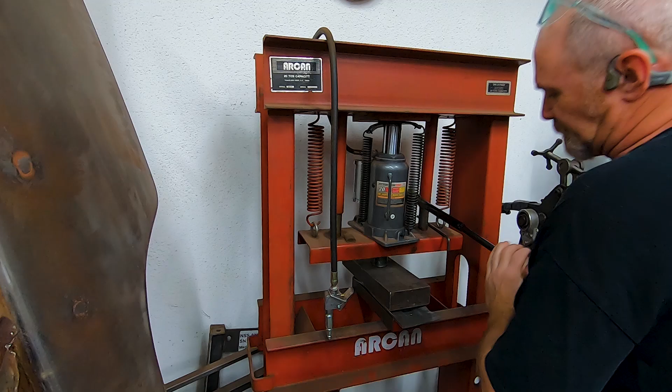Alright, so the next step is I gotta take the new blank and I gotta start putting these beads in here. I haven't quite finished some of the welding and stuff on this. There's some finish work to do. We'll take care of that after we get that patch panel over there put together.

But I think I'm gonna try something and combine a couple of different videos here. I want to make a 3D printed stamping die to try to at least get maybe these two. So I'm going to trace all this out and make a pattern of the depth. Then I'm going to go back home, fire up the 3D printer, fire up my software, and make a die out of ASA, which is like ABS, 100% infill, and then I'm probably gonna try to stamp it out on my hydraulic press.

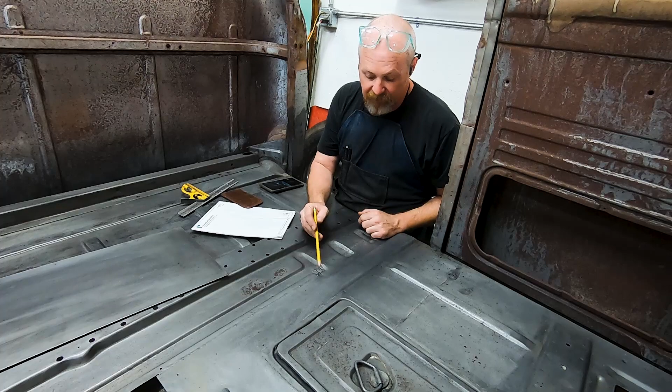Again, my goal here is to make this look as factory as possible, and having big ugly welds and hammer marks and beat up stuff all over it is not my style. I want it to look better. Most guys overlap it, MIG weld it, bury it in mud, bed liner, whatever it takes. So we'll dimension all this stuff out, then I'll pick the depth, and then I'll take this stuff home and we'll get started on the next part.

Usually the best thing to do is a one-to-one drawing of exactly what you've got going on, right? So take a piece of paper and lay it right over the top of that, and then just take your dirty finger and trace around the open hole, and it'll leave a mark where those holes are. It just makes dimensioning stuff a little bit easier. Probably can't see that all that well, but lighting is what it is.

So, tape measure, from my kangaroo pouch. We can go peak to peak to peak, so we know where everything's at. And as with typical tape measures, you drop it a bunch of times and the end is hard to read. It's supposed to be loose like this. I don't know if you know that, guys. I don't know how many times I've seen people get frustrated, saying this tang is loose, this thing's bad. Well, it's for inside or outside, depending on where you're pulling your dimensions. So it's an engineered amount of slop, right?

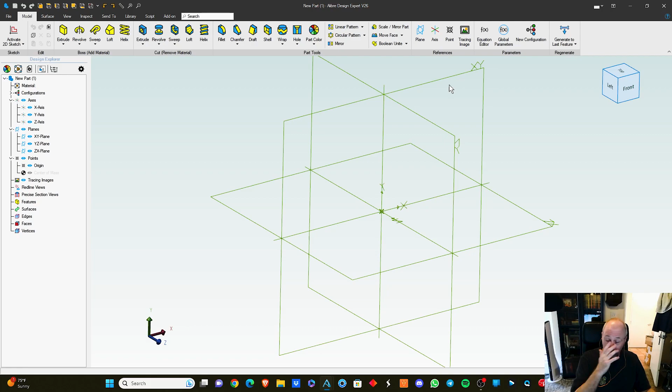So anyway, pick a plane, our XY plane. We'll activate a sketch. I don't have a preset on this one, so I'll have to hit the reset view kind of thing. So now we've got into sketch mode. So let's pull our rectangle tool, and we'll draw just a basic rectangle. And don't worry about dimensions.

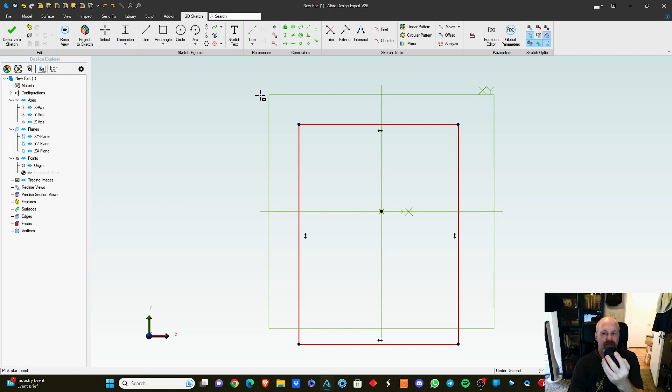Now, I'm used to my keyboard shortcuts. I don't know a whole lot of them because it doesn't matter in Alibre that much. But if you hold your 2 mouse buttons down and the shift key at the same time, you can pan. Or if you hold your left and right mouse buttons down without the shift key, you rotate it. And then we hit reset view and it snaps back. I know in Fusion you can make it work that way, but it's not their default. They've got their own way of doing things, so I just struggle. Let's make it happen.

So we know our die set is going to be 1 5/8 inches wide. So our base, the platform we're going to build, needs to be bigger. So like 2.5 would be a good width. So let's do that, because we're just going to do one of these at a time. I thought about it, and I think that's going to be the better solution. Now, you see it shortened up on one side here.

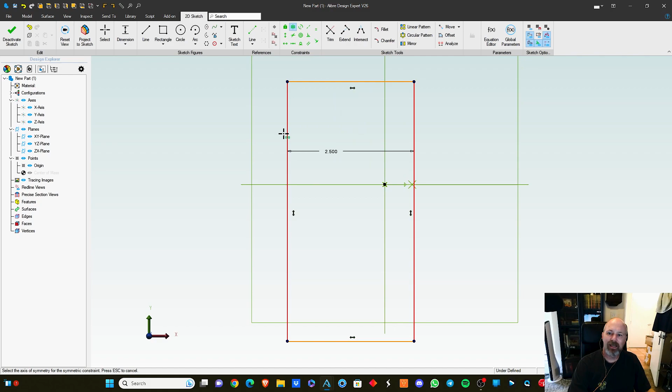And it's offset, right? So there's a couple tools. Up at the top, there's a symmetrical constraint. I like that one for a lot of this stuff, if I'm not going to be rounding the corners and stuff off, and there's a couple ways to do that. I can show that stuff down the road here. But that one works pretty good. We're making a platform, and then we're going to radius some of the corners after we process this thing.

So let's just make the punch, basically the piece that'll go into the top. That's the part we're going to make. So our overall length is, let me do this. Let's put another rectangle in here. Okay, and then select, highlight everything, right? And then right click, convert to a reference figure. So now you see it's a green dashed line. So when you do any more functions with it, that is just like measurements, right?

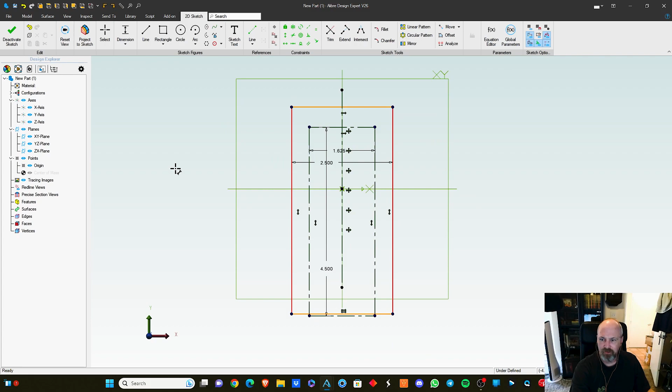So let's go ahead and centrally constrain this one, and then dimension it, right? So that is 1.625. And then our height is 4.5, right? So let's do our symmetrical constraints. Scroll wheel is your zoom, right? So pick our midline and our outer pieces. Okay, so it centers that one up. Let's center the block that we're going to build here.

Okay, so now we've got, this is our reference, this green line frame, and then you see the red, orange, and then they'll turn black when they're fully constrained. The red ones are because we don't have any dimensions, the oranges because we do have a side dimension on it. That's our 2.5 here. So we know that's what that is. So you can drag that, and then you can kind of get an idea.

So we know that our wall thickness is 7/16 of an inch, right? So let's make this the same. Let's make that .4375, right? Okay, so now you see it's all turned black. Now hit deactivate sketch and extrude and put it into perspective. So default, it's 5 inches bossed. So you can change that while you're in this window.

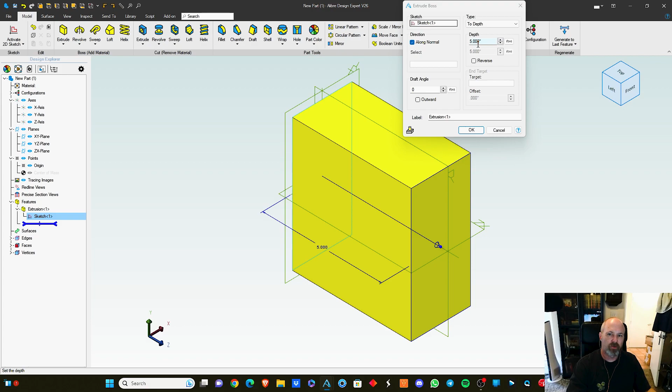I only want it, say, 1/2 inch. Or if we want to go the other way, because we're gonna make the punch, right? So we want to reverse it. So you hit the reverse tab, it pushes it out onto the other side of your plane, your working plane. Okay. So now that you got like a basis, it's really smart to just start saving some of this stuff.

And let's go. I catalog everything. I try to put everything into folders, and if you don't, you get a big mess real quick, right? I thought I had just a. Oh yeah, right there, 53, 56. So extra cab truck, and we'll just call it floor. I've done a couple of them there. I already saw some of those, right? So we just call it rib punch A, right? So we know we get the small.

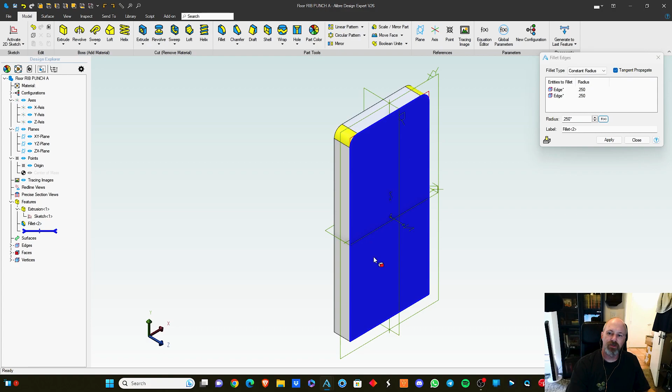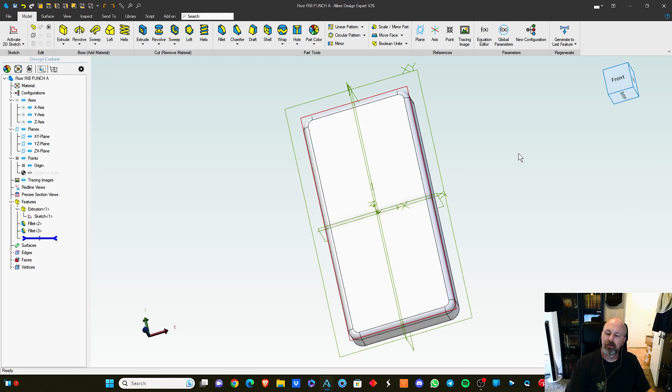Now you could go through and you can hit your fillets, and you can specify how big you want your fillets to go, right? So you can go right on those edges. If you're gonna make a punch, having softer edges is gonna leave fewer marks in your metal when you're done. Okay. So then the other one is we can hit right on the top, and I want to reduce that to, I don't know, 1/8 of an inch, because I don't want that big of a radius on the top of that. So now you can see that's our piece, right? So now we need to make the form.

So a couple of ways to do this is let's pick our YZ plane, activate that sketch. Okay, and then, oops, hit the wrong button. Hit caps lock instead of shift. All right. So just go ahead and start kind of sketching out what we're gonna do. And remember, we've got that radius that we got to deal with, right?

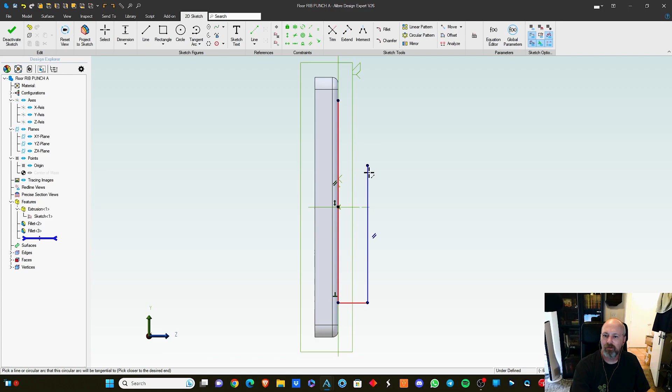And then go into our arc tools, and there's a tangent arc. So we can select that line and do that. So now we've kind of got a basic shape of what that is. We're going to edit this here. That's where it's coming up close to the seat platform. So let's go ahead and dimension. So we'll pick our plane.

Alright, so that's another way to centralize that. I could have done a symmetrical constraint on that, but because it doesn't have 2 lines that it's constraining, it's just got 2 points, sometimes it can fail, it can lose that dimension. So we're going to do it that way, and then we'll make sure that our baseline is right on that axis. I'll lock that down, and then our depth was 5/16, right?

I did write that down. I know I said it and I forgot to write. Oh yeah, there it was. 0.3125 deep. So we got that. Now, let's put the radius on this, because this is going to make doing our constraints easier. Right? So see, it doesn't want to do it that way.

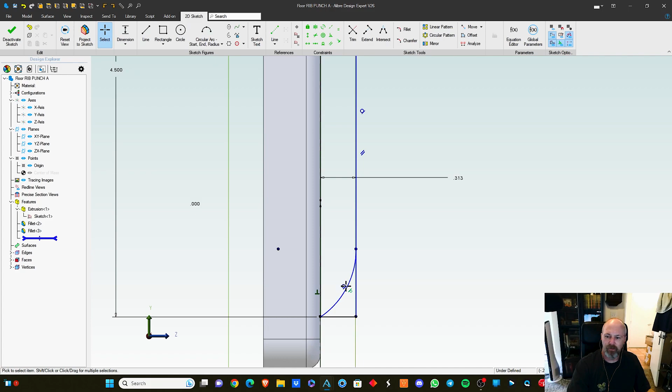And see, it auto constrains. It put a tangent constraint right on the panel. You can see everything's highlighted in blue there. So now we can go through with the trim tool and knock out all the other extraneous stuff. So we know that the bottom footprint, the flat part, was 1.188 inch and 3/16. I'm sorry, I did the wrong dimension. So it's 2 inches, and then it's inch and 3/16 long.

So let's grab our tool. We can move this and see how the radiuses change. Now, one of the things I did is I measured basically from point to point, and I came up with 1.25 inches. So that gives us our radiuses, and that's also 1.25 inches. So now we kind of got an idea, and if we want to change something, see this one's in parentheses here. That means it's just a non-editable dimension. The ones that are not in parentheses, you can hit edit.

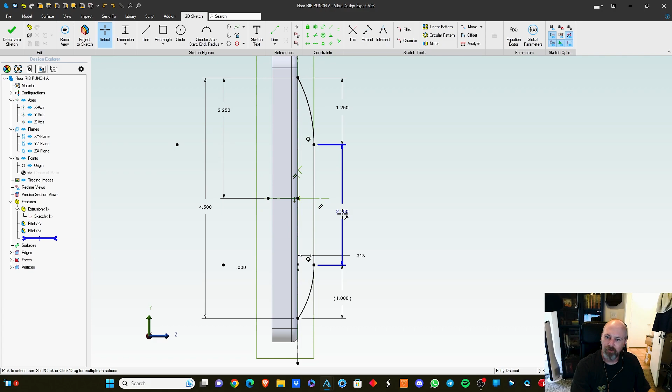I'm just gonna do it. So say we want to make this 2.25. See, it changed it to 1 inch. Okay, so that works out pretty good. Then hit Control Z, undo it, it puts it right back where it was. So deactivate, everything's in black now, and then we go back to extrude and roll it so you can see exactly what's going on.

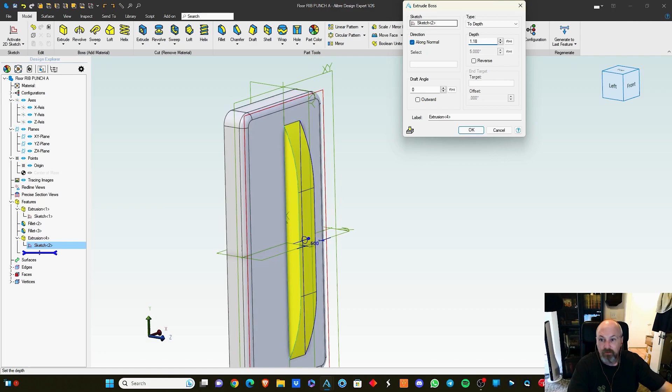Now, this is the 1.188, right? So now it's offset. Edit. You could have done this before, but up at the top here it says mid-plane. Hey, look at that. So that is our punch. But we want more of a zero clearance on this. So hit our chamfer tool, and you can do it in a couple of different ways. Our overall was at 1.625 inches, right? So we want to get out to that.

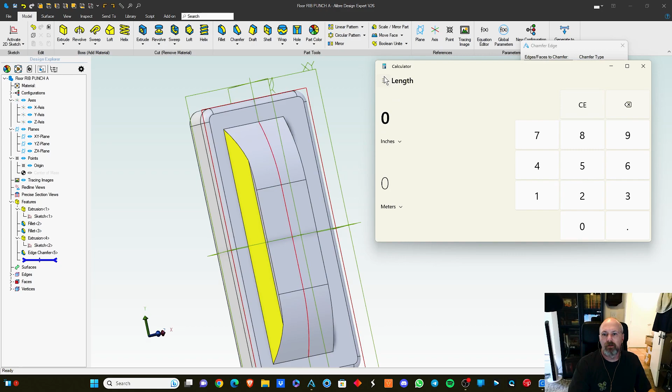So we can do a little bit of math. Get your calculator opened up. 1.625 minus the 1.188, divided by 2. So that is our dimension. So we want to go back in. I'm going to take this off the screen just so you don't have to look at it. So distance, distance. Okay, so we got to change this. One is going to be 0.2185, and the other one is 0.3125. Yeah, look at that. Perfect.

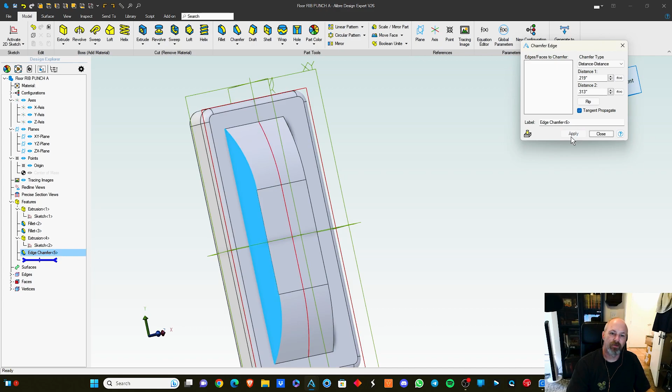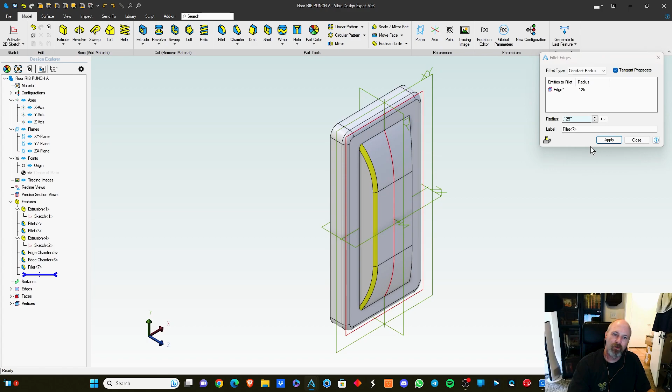So put it on the other side. Look at that. It auto-generated it all. Alright, close. Oh, shit. I forgot to hit save. Apply. Okay, so save it. It's important to save as many times as you can. So now we want to go through and put some chamfers on things. 1/8 inch is good. You can pick multiple, apply.

And then around this, it's probably got to be a little bit bigger. It's a top radius. So you got to think about the top and bottom of the metal. That's how it's going to push down into the sheet metal. So that's our basic die. Save. That's our punch, sorry. Now, we want to put a couple holes in it so we can bolt it together. So just pick your XY plane again.

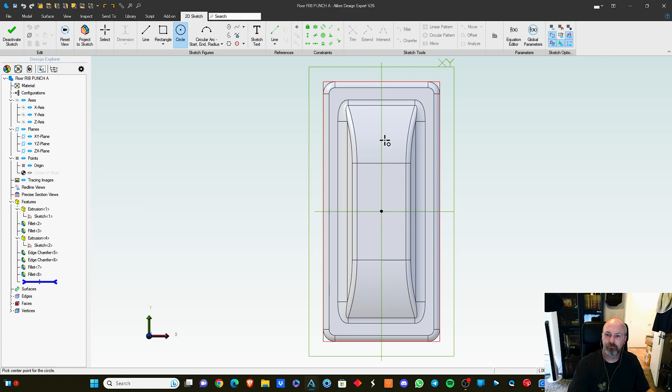And now we're just going to do a couple holes. It really doesn't matter where you put the holes. And make those equal. Sometimes it'll auto constrain, sometimes it fights. We're going to equal constraint. And now we'll start dimensioning them. 5/16. Alright, and then I'll put a distance on these. So let's make them 2.25 right there in the base of it.

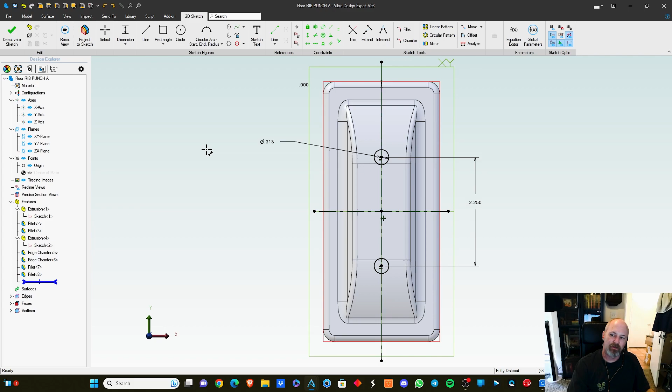Oh yeah, see they're orange because they're not locked to that middle line. Now they are. So you can go ahead and continue even if it's not constrained, but just be aware that if you do any processes down the road, those holes could have moved to one side or the other. So deactivate, and then we're going to extrude through all. All right. So now we've got that. So that's our punch.

Save it. All right. So now that's going to be the piece that pushes down. We're going to form that little mini ripple like this, right? So I'm going to put a B, because this is the back of the vehicle, right? So I know which radius is which, because remember the radiuses are... no, the radiuses are the same, so it won't really matter. I'm going to put it on anyway just to show what you can do with this.

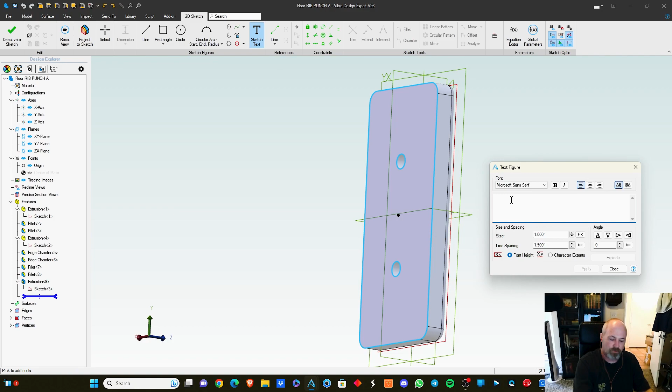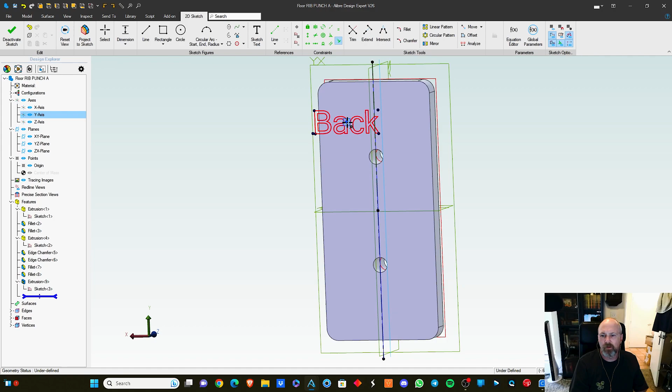Text, just put, and then we've got to shrink that down. Apply, and then we can constrain it. There's a coincident constraint right on the middle there. Oops. One. Let's go higher. Yeah, see that? It does this every once in a while. You hit edit and it doesn't actually do it. There we go. I like that better.

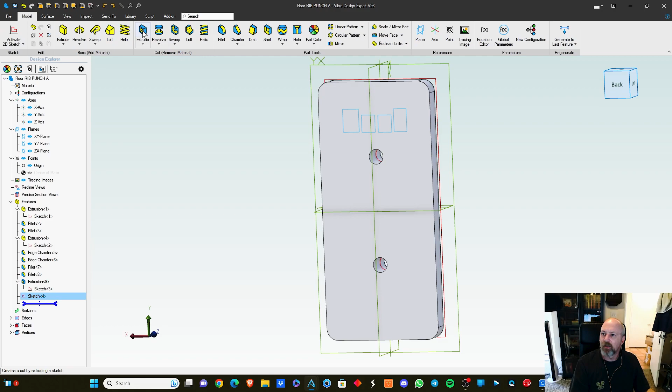Okay. So now deactivate it and then extrude. And we just want this to be like 50 thousandths. We don't want a huge... Wait, did I hit the wrong one? Wait. Why is it doing that? There it goes. All right. I don't know what I did there. So now we've got our top punch kind of drawn, right?

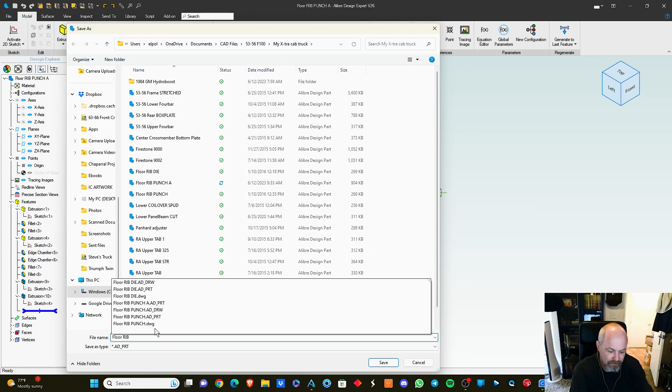So let's save this as B. We're going to call it die. Okay. So now we've got a lot of this stuff already drawn, right? So let's knock the fillets out. Just suppress them because we might be able to reuse some of those. Alright, so now this is our progress bar. In Fusion, I think you'd call it the timeline. We can move it up and down on this one.

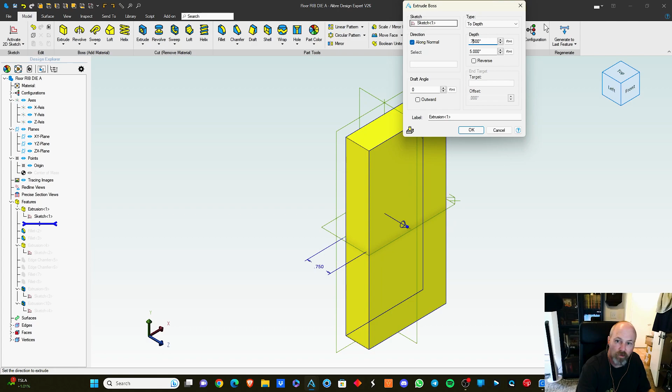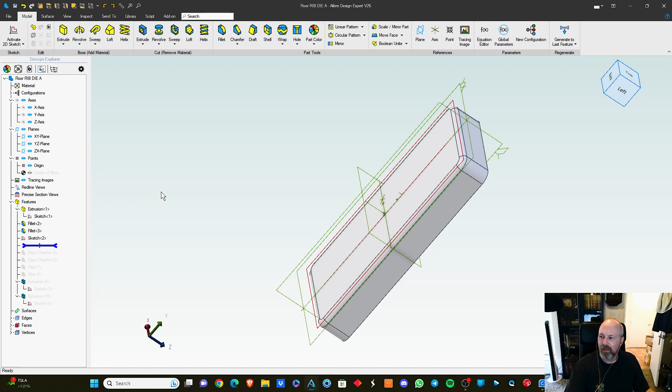So now, our extrusion, let's reverse it. And let's make it a little bit thicker because we're going to make a hole in the middle of it, right? So now we make our radiuses. And again, the fillets on that side, and that's good. So now this one is the problem. Now I just made this inside. So let's delete that, and then let's do an extrude. Same dimensions, mid-plane, right? Mid-plane 1.188. Okay. So now we got our pocket.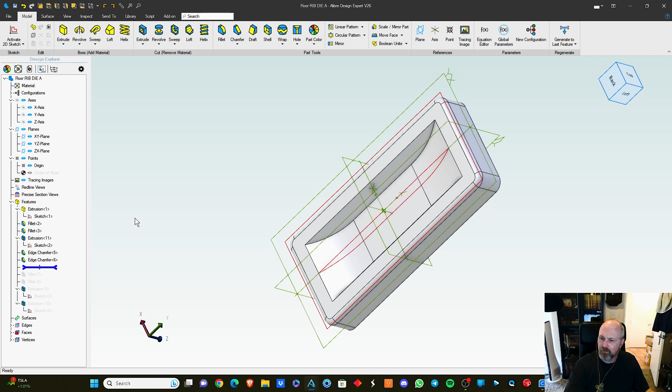And then let's see if we can get some of these edge chamfers to come back to life. Unsuppress them. Nope. So let's edit. Look at that. It did it. Okay. And just pick that edge. Okay. Alright. Now, there's a problem I've already introduced here. The depth is going to be okay because we've got the thickness of the metal, but the width is not. The material we're using is a little more than 50 thousandths of an inch thick, right?

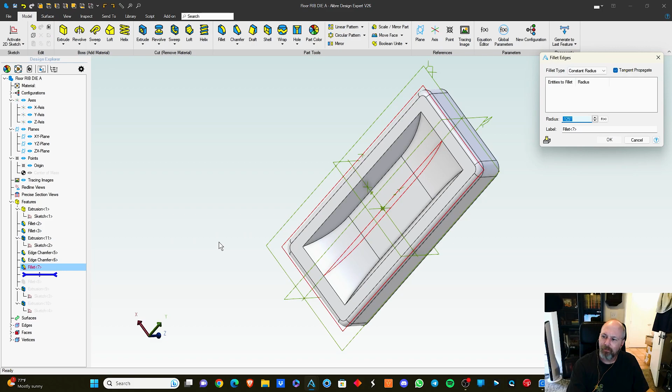So let's go back to our extrusion, and we can actually do math right in that window. That's just going to be on one side, so you actually need to make it 0.1, right? 0.1 inches. Look at this. Okay, so now we drag our little progress bar down. So now it's wider, so as the punch comes down, it pushes the metal in. It's got room for the metal to go inside. So now, let's see if we can get some of our fillets to come back to life. That was these guys, right? Yeah.

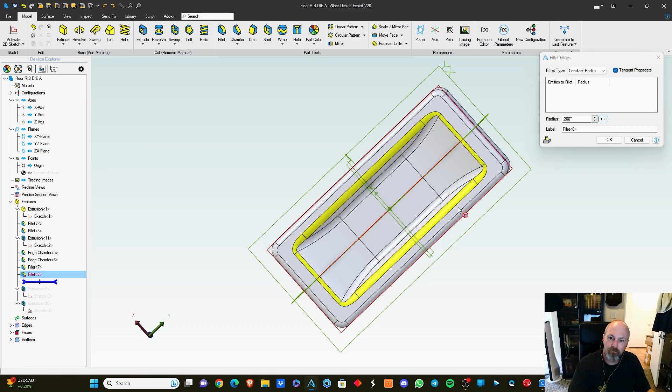So let's change that to the bigger radius. Let's make it 0.175 for the thickness of the material. Right. And then the next one was the outer. So we're going to decrease that one to just 200 thou, because we'll take that 50 thousandths radius off of there. Okay. So then we can go all the way down. We don't want to change the back. We can leave the back on there because it's still the back, right? So that's a quick way of getting everything put together.

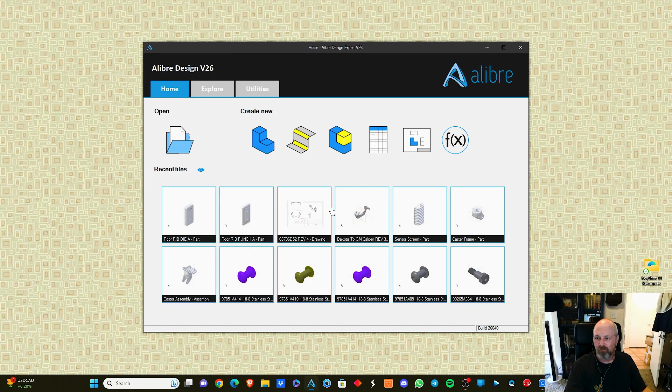So now, let's close that out. Let's make an assembly. We can just check our clearances. Where did I put them? I forgot what I just named them. Nuts. What did I name it? I can't even fucking remember. Floor rib. Jeez. My old brain. Insert design. Floor rib. Where did it go? There we go. Floor rib A. Don't worry about where they go. Just put them on.

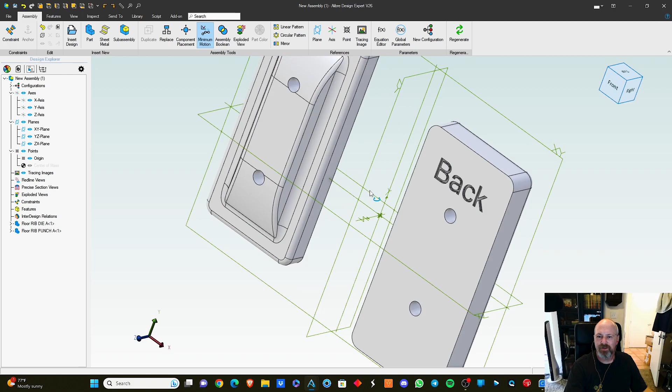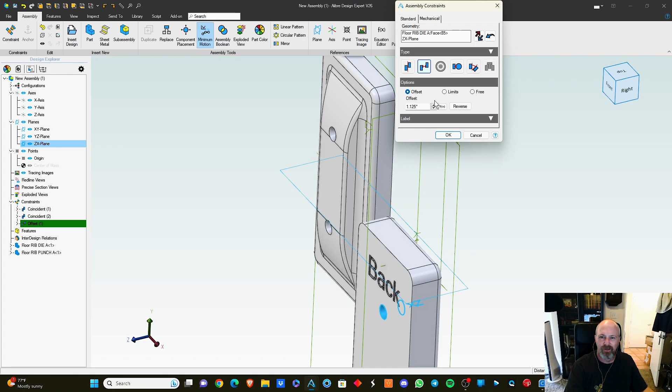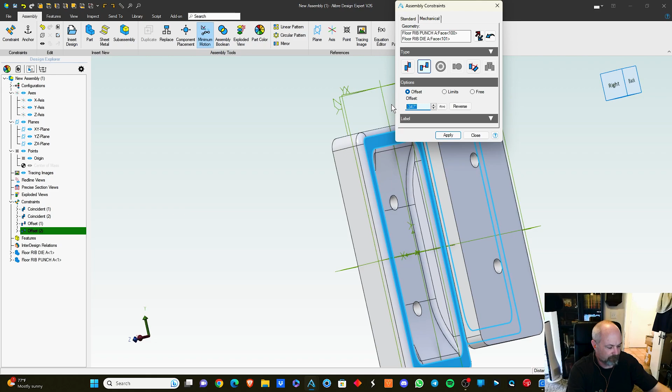Okay. So now we can see our two pieces. Probably the easiest thing to do is hit our constraint and then pick our plane. It's kind of hard to see in there sometimes. Just zero it out, and then our holes are a good centering device, right? Okay, come on. And we do another constraint. We put the two faces together here, and we're going to leave a 0.05. Come on. Alright, apply. And then we're going to lock these guys together. So now we need to check what's going on. So let's save this.

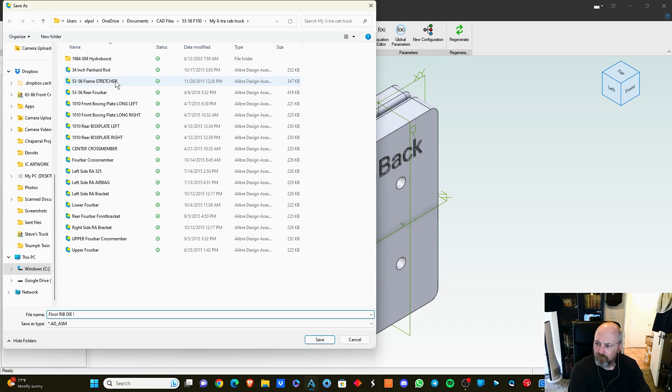Right, so now we need to add in a section view. So let's select the two pieces. And I want to pick my Z-plane. Okay, now when we look at that, we can see we've got a nice clean path of 50 thousandths all the way through this. Right?

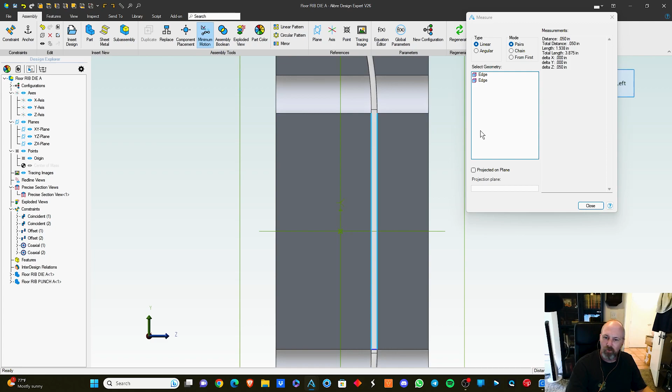So you can hit Control M, get your measurement tool, and you can pick these edges. And it should show you 50 thousandths of an inch right there at the top. Pretty cool. So just make sure that we've got everything put together pretty nice. And then we can hide that one. And now let's do another one. Let's add another one in the original plane, and the two parts that we're going to section.

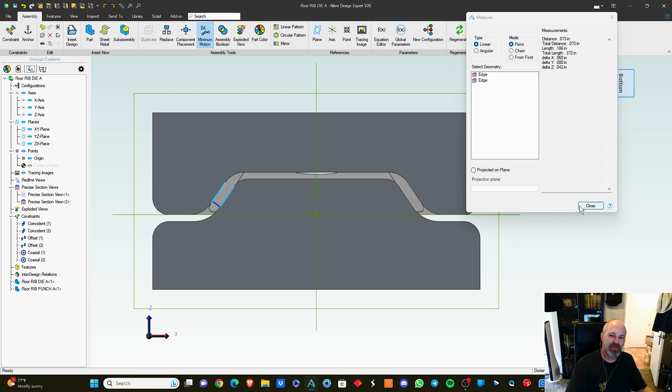And then we can look and we can see we've got a little bit more gap on the sides, right? So 73, because it's at an angle. So that 100 thousandths that I added into the die is too much. So let's drop that down to 75. So edit here, right? Edit here.

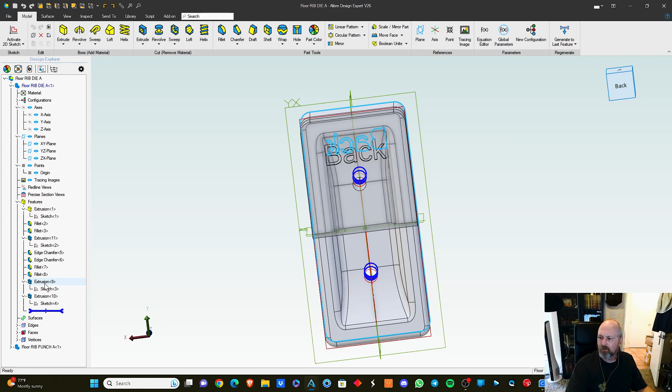Let's cut here. So let's edit that down. So it's got our 0.1. So let's just change that to 0.075. Okay. Close is going to be good enough on all this. Generate to last feature. Save it. And then we go back in. 60 thousandths. So that's not bad actually.

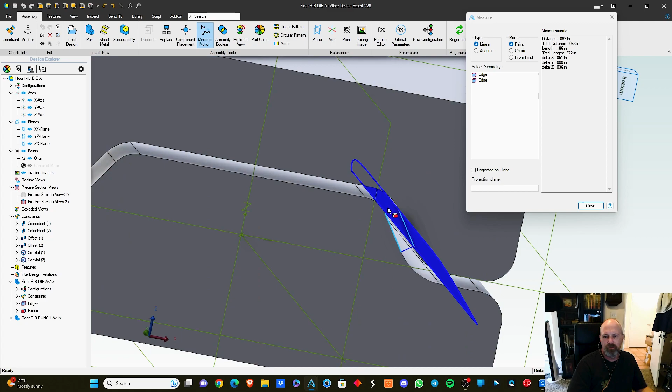If you make this too tight, you can actually start creating other problems for you. You want this impression and this impression to be a little bit tighter. You're trying to get those radiuses in there, so the angle might not be exactly the same. You can change the radiuses on some of these if you want. I'm going to leave that there as just kind of what it is. Let's hide that again.

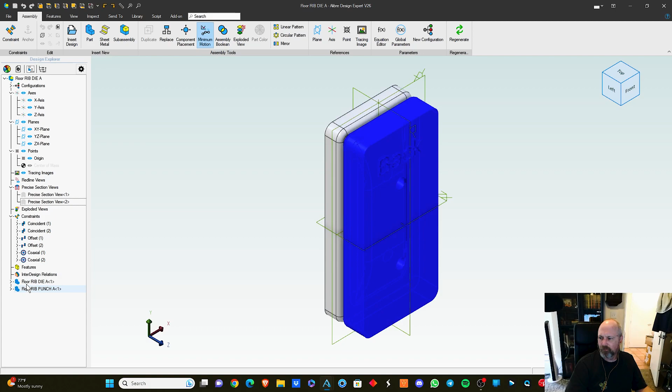Alright, so now we need to turn these into STL files, right? So we want to edit this in a separate window. Okay, and then we'll go into our export tab. Just an STL file, so we're going to 3D print this stuff. And we need to put it into the right file. I've got a lot of stuff preset on there as far as like faceting and stuff.

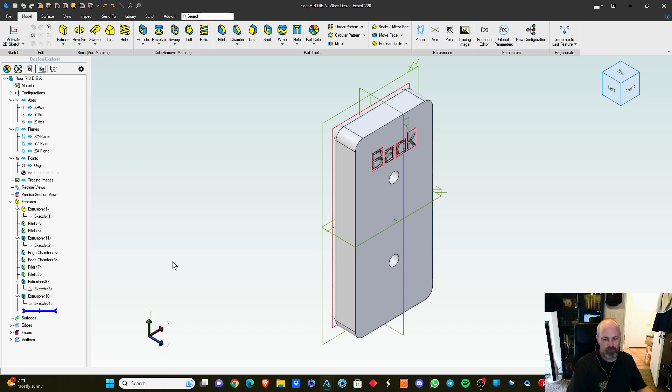You're going to have to experiment a little bit when you're taking your designs and pushing them out, because if you get too many facets into something, it can really slow your machine down. If you've got a good machine, it'll handle that stuff a little bit better, because the fewer facets you have, the rougher, the more origami looking it would be. So you want to put as many in there as you can, but there's a certain point where it's just useless. So that one rendered out good. So now we do the other one.

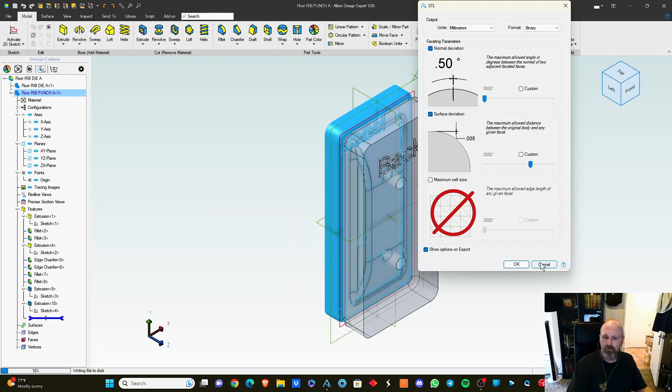Nope, wrong one. Crap. Will it do it? Let me see if I can export it. Oh yeah, it did it. Okay. Nope, take it back. It did not. Crap. Generate last feature. Come on. Poop. Okay, so this one, I did this one, right? STL. See, die A is in there, okay. We've already done die A, we need die B.

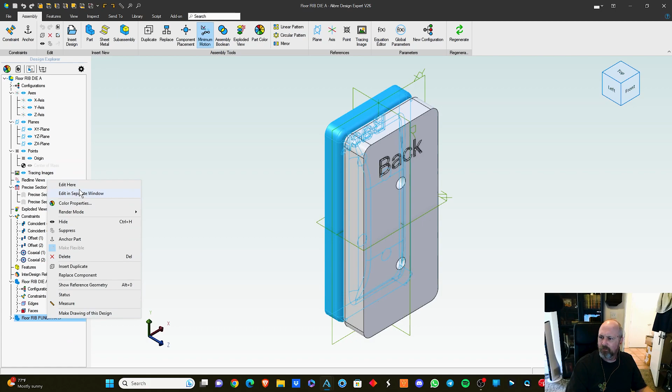What is going on? Where is die B? Oh, punch. Where's... Crap, that's what it did, didn't it? I just screwed up. Naming schemes make everything. Let's see, what did I do here? Punch A. Okay, let's try that. Sometimes I'll just name it punch and punch, even though there'd be like A and B, because it's just easier that way sometimes. So die, punch, good, we got it.

Alright, and then again, here's that STL thing I was talking about. So I've got a deviation of a half a degree, and then our surface level is 5 thousandths of an inch. So any step is going to be within those constraints. Anything finer than that on a 3D printer, you're never going to notice it.

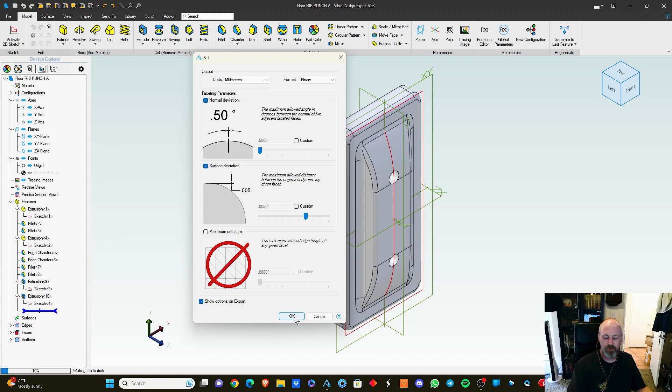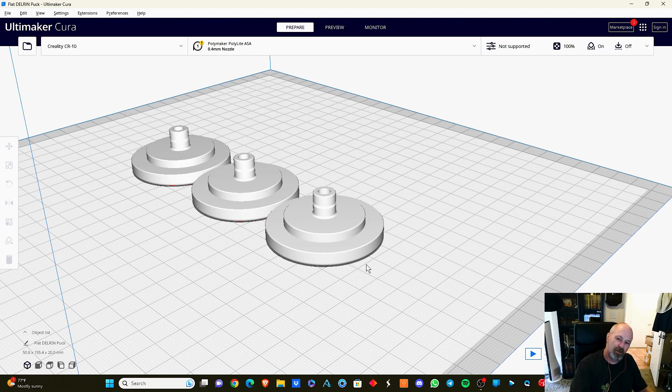That actual tool holder from Eckold broke in half, and now I gotta buy another one of those. I really like my plastic dies for these, for the Eckold machine.

So to get back to what I was going through here, one of the things is this. This is called an auto temp tower. It's something you can get in Cura here. So go to extensions and then auto towers, and then I did one for ABS because ABS and ASA are very similar. ASA is a little more durable as far as weather resistance, and I think it's got a nicer finish than ABS can have on it.

It's not bad. I bought this particular gray ASA for making exactly stuff like this. I've got another project that I've been working on where I'm building a custom steering wheel, and I'm using it to create die holders for the wooden grips. So we're not worried about that right now.

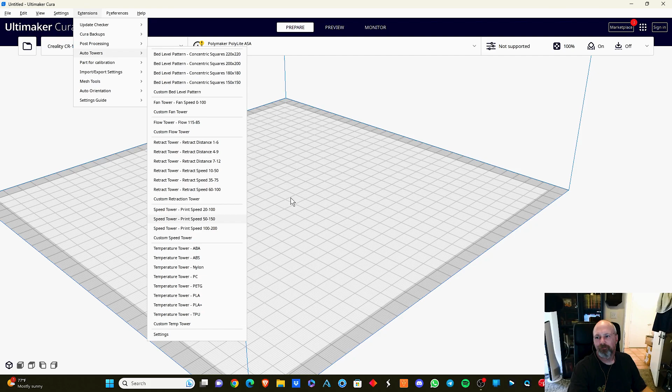But anyway, do a temp tower, and on the side here, it'll tell you what temperature it was. And I found out I've been printing at 250 because that's the recommended. But I went through and looked at my bridges, so 250, 245, 240, 235, and it just gets cooler as it goes up. The 240 is the most complete.

You're not going to see that, but as far as the filament hanging down and the most infill and stuff on the top, the 240 was actually better. So I printed those hammerheads in 240, and adhesion between the layers was really good. The finish on it was some of the best ASA print I've ever done, and so I really implore you guys, if you do any 3D printing, do temp towers.

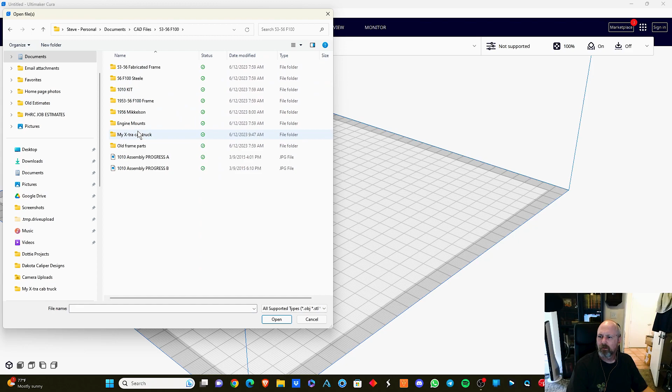I've got the printer here next to me, and we'll go through that next, and I'll try to set up a time lapse so you can kind of see this thing print. So let's open these up. Yeah, there's our old stuff, right? So let's go back into where, and there we go. There's our two pieces. And you can see all the old drawings and stuff that I've put in there.

So let's open them up. And hopefully they lay down the right way. If not, okay, one. Where's the other one? There it goes. Alright. So let's move this one over. And this one, we need to flip it because I want the die side facing up. Pick that. There we go. So now hit arrange.

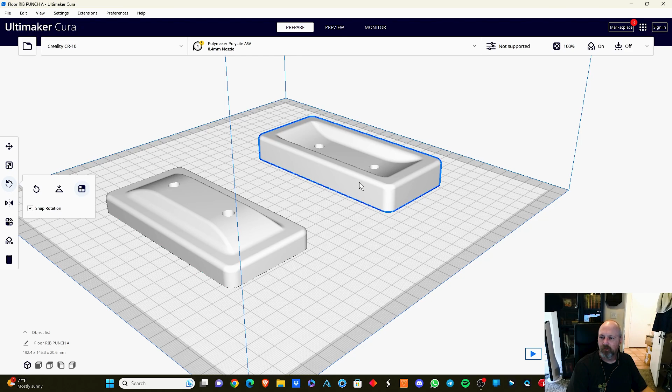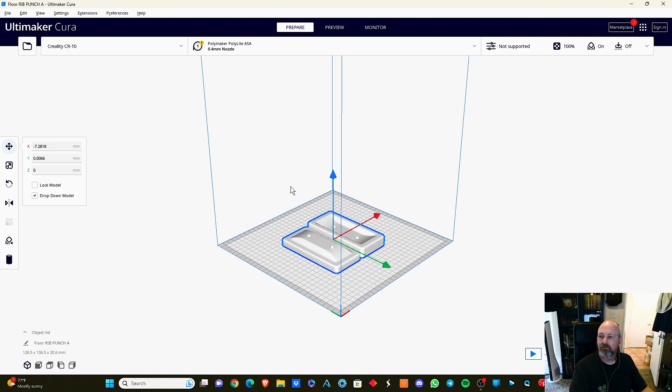And then hold your shift key down, and you can center them back up on the plate. I like keeping them in the middle of the plate better. Just looks nicer. That's where all the glue is on the print plate. Alright, so now we can slice it. So everything is already picked up in Cura.

I've got my layer height at 0.15 millimeter. I had to drop my initial layer height, so I've got a little bit better adhesion. And that bottom layer on the print actually turns out smoother. Because if you have a 0.3 millimeter, it has zigzags and stuff, and there's little voids in there, and it doesn't want to stick as well. So, like I said, drop that down, and I get better.

And then, as far as everything else goes with this particular material, my infill density is at 100. There's my 240 for the print temperature. I'm going to be in the way on some of this stuff. I've got it at 70 millimeters a second for travel. I've got a retraction in it to keep from stringing so bad. I've got generate support on this. There's not any support needed on this, but it won't generate it if it doesn't need it.

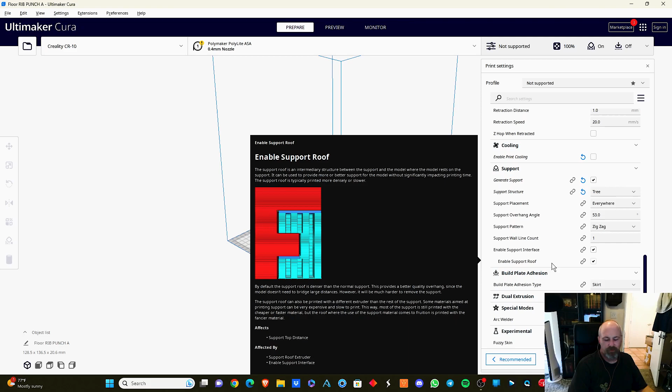But I've been having really good success with the tree supports, right? That's the tree supports. They seem to break out easier. And then build plate adhesion, I'm just doing a skirt because I'm using a Matter Hackers G10 fiberglass. You get to see that here in a minute with Elmer's glue stick on it, and it seems to work really good. I don't have a heated chamber for my machine, but it is what it is, right?

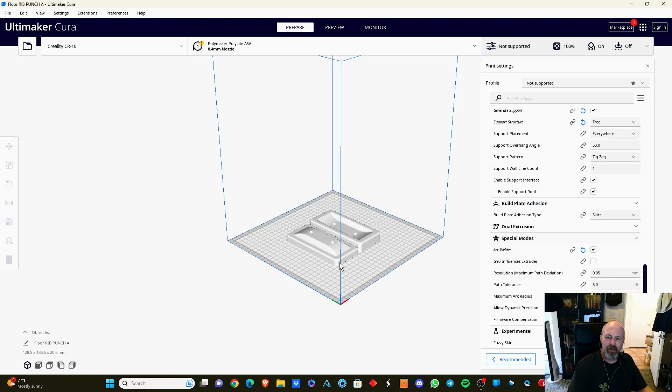So the other one is special modes, arc welder. I like that for a lot of this stuff for radiuses. So what it's doing, actually you can't see that, there it is. Now you can see the arc welder. When the printer is printing, like that radius, we've got this radius on the edges here. What ends up happening is it splines, right? So remember we were talking about when we saved it as an STL, we've got that half a degree splining, right?

So what arc welder does, it's a little post-processing Cura add-on that changes that into a radius. It's a different type of G code, because most of the slicers don't use radiuses; they just have splines. So it's angles, right? Just flat spots. So that actually turns it into a radius, and you end up with a lot nicer finish on your part. So let's close that, and you can't see because I'm in the way. There's a slice button down here. And slice.

And I'm prepping my little USB, or it's an SD card that my printer uses. So save to disk, which is good because we do want to save. No, save to removable. So it should be floor rib punch A is what we've got. Okay, so eject it. Now we've got that card, so let's go ahead and get the machine prepped, and I'll switch over to a different camera here. All right.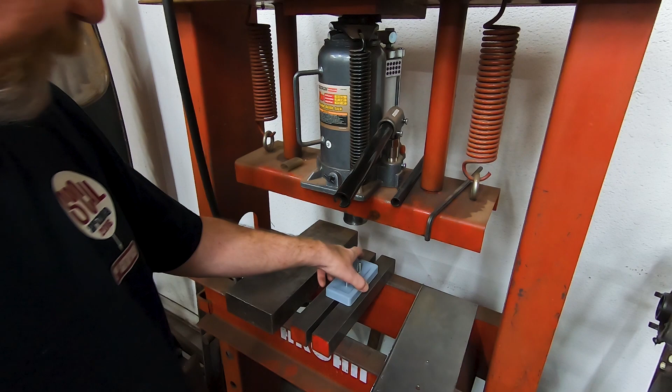So we put them together, we see they fit really well. If I turn one of them over, they still fit, but they don't fit quite right because the radiuses are different. If we were going to have something where the radiuses were radically different, we definitely want to be able to mark it so we know which side is which. So let me go find some hardware and we'll stamp it out. So one of the things you need to figure out is your setup. The bolt heads are going to stick out past the back of this thing. You need to be able to go in something so it sits flat. And I've got a couple of pieces of bar. Made sure that this will fit on here and we can get it all stamped together, right?

One of the things I'm concerned about is pre-stretch. I want to see how much this is all going to shrink up as we stamp this shape into it. How much is it going to move? If we see a lot of movement, we know we're going to have to sit here on the power hammer or hammer and dolly or something. We're going to need to stretch this area until we start getting a bubble. That's kind of one of the first tests we need to do. So we'll go ahead and get started on this. Let's just do a dry run. We know we're probably going to have to do something. We're going back to back. Yep. Alright. Put that on there. And the bolts will push through.

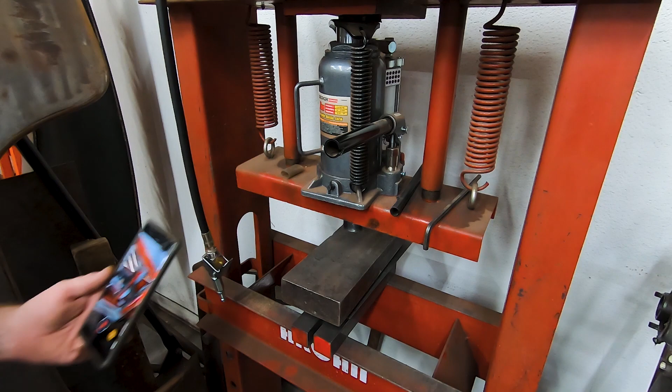One of my favorite things in the world, the hydraulic press. This one is air over hydraulic, but it's noisy. And you just want to see me work anyway. It's kind of the whole point, right? Yeah, I'm using my phone to monitor the GoPro here. All solo. No helpers. Not yet. And as we're getting close, I'm going to change the camera.

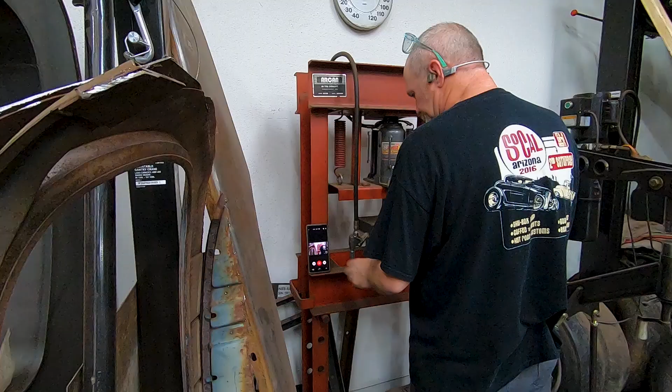Look at that. See how much that thing tacoed up? Alright. Alright, see how bad this is. Come on. Alright, so first look, you can see it didn't do it super clean, right? We knew it was going to wrinkle up some. Just wanted to see how bad it was, so we'll take it over to the bench and we'll pry it apart.

Alright, next one's all set up. Let's get ready. I should probably set up the air. I'm just too lazy. And that compressor makes a lot of noise. And I know audio is kind of a precious thing on YouTube videos, so I'll just do this. Find out real quick here if this is enough stretch or if I gotta do more. I know it can't be less.

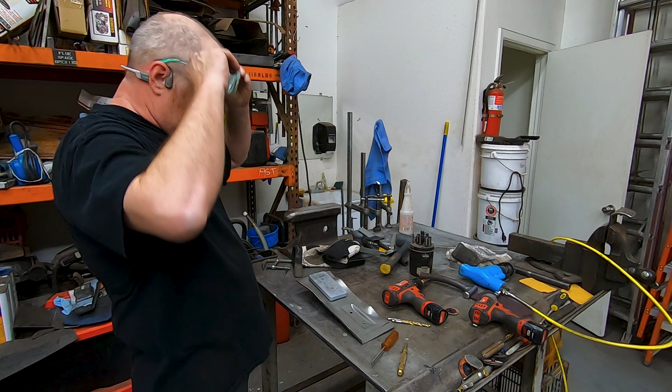Alright. So what do you think? Really bad? Good? About the same. Yeah. About the same. Huh. Well, let's see how bad this one is. You just have to do a lot more stretching. Come on.

Well, if anything, we know the dies work. And critically, you really can't tell the difference between the two. Actually, the first one, this is number 1, this is number 2. Number 2's got better definition in the stamp, no doubt about it. But what I do have is a lot more distortion on this side than I had here. This is about the same. There really isn't much different.

So the lesson is, got to do a lot more stretching. But what is encouraging is this definition around this edge, the pocket and everything is so much better. So I wonder how much straightening it's going to take to get this. I'm anticipating I'm going to have to do some straightening on the other part when we get ready, but let's just see how bad it is. So, actually dead blow works great for a lot of this initial. Put it right up against the edge.

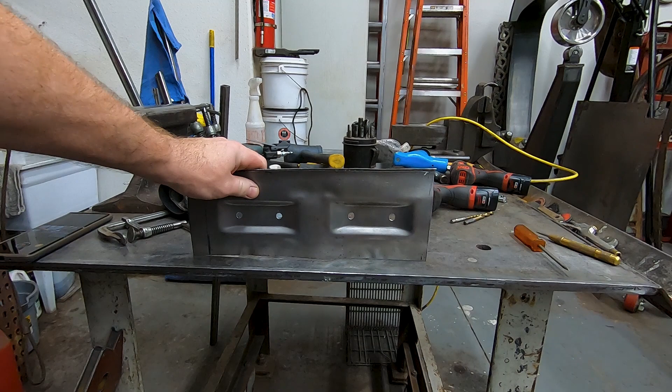Yeah. That's interesting. Number 1 and 2. I don't know if you can actually see this. Let me see here. Hopefully you can see this. I'm gonna hold that, was a straight edge. You can see daylight under that. So it curled it. It shrank it and turned everything. Yeah, nowhere near enough stretch.

Mark where our holes go. We don't want to put the holes in because it's just going to force the metal to go into the hole. And we don't want to do that because we're trying to stretch the metal, not displace it. Right? So mark it, and then we kind of know where our line's going to be, right? So it's always a good idea to kind of lay stuff out when you got a chance.

You know, our start and stop points are about in here somewhere. And it's not going to be super critical exactly where our start and stops are, but we got to kind of have an idea. So let's get wheeling again. All right. Pick up where we left off. Right?

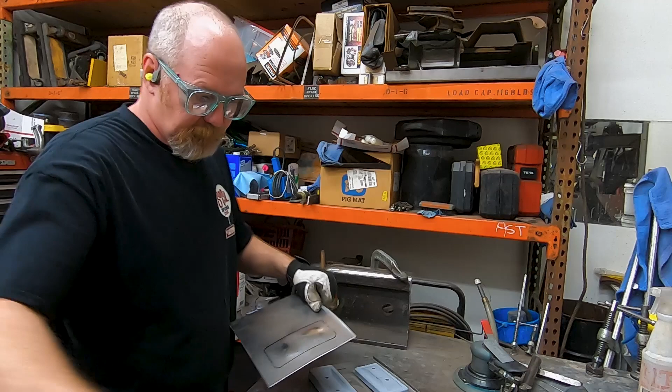So that's got quite a bit. You can see it's got a lot of crown to it now. So now we want to make our die, right? Still think it's going to be easy.

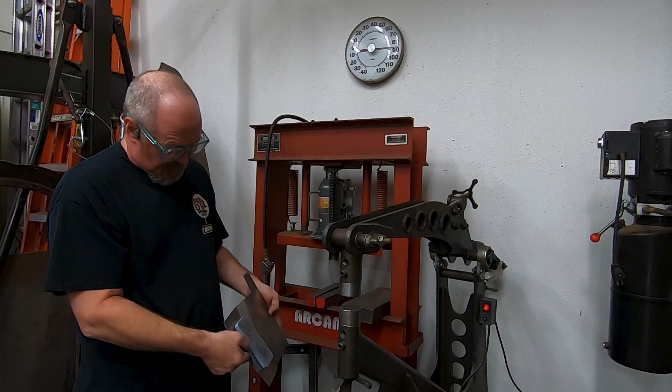All right, so let's try this one more time here. Still curled up some. Let's see how bad it is.